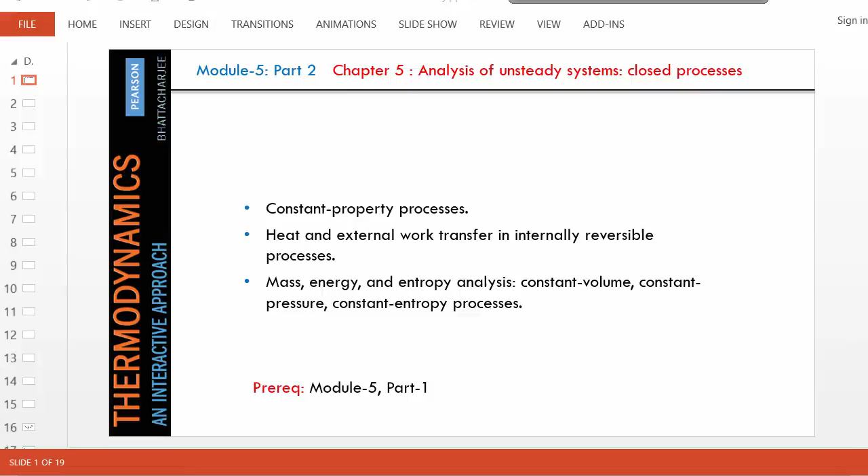Now that we have laid out the balance equations for a closed process, let's look at different types of closed processes. But first, let me write the equation that we developed for describing a closed process. If you recall, delta E equals Q minus W external. And most of the time, KE and PE are negligible. And this is what we get for the energy equation.

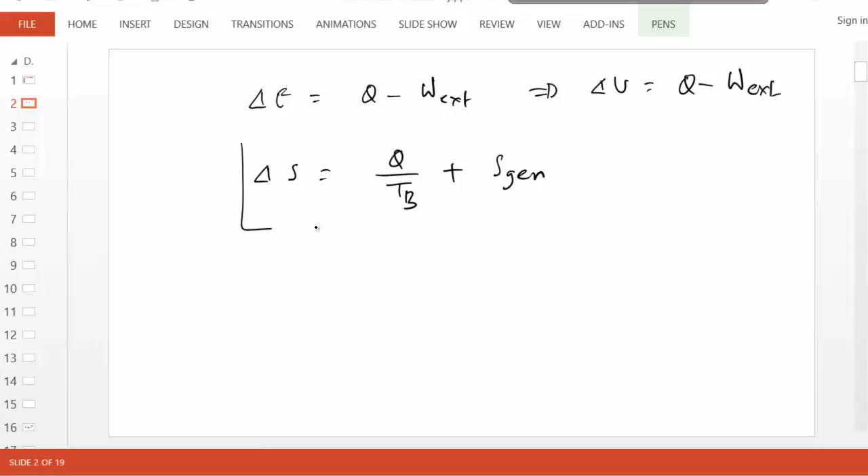Similarly, the entropy equation is Q divided by TB plus Sgen. So let's keep these equations in mind and let's visit some animations to explore. Now the first one, this is a little bit abstract, but we want to figure out the meaning of the TS and PV diagram.

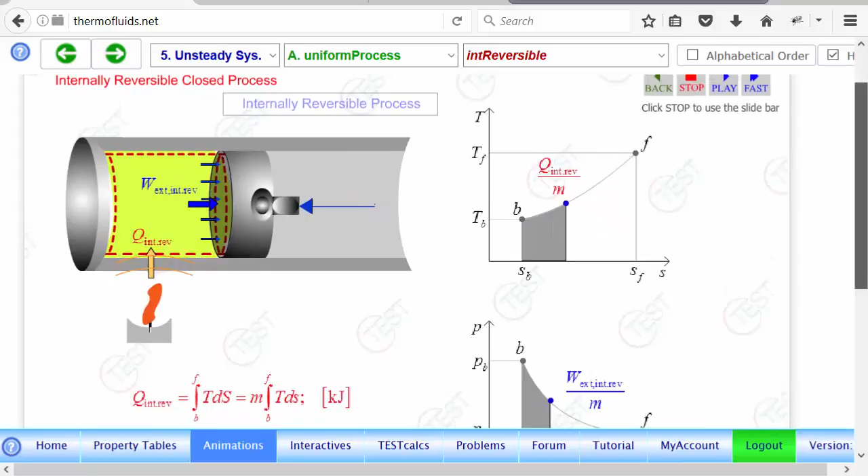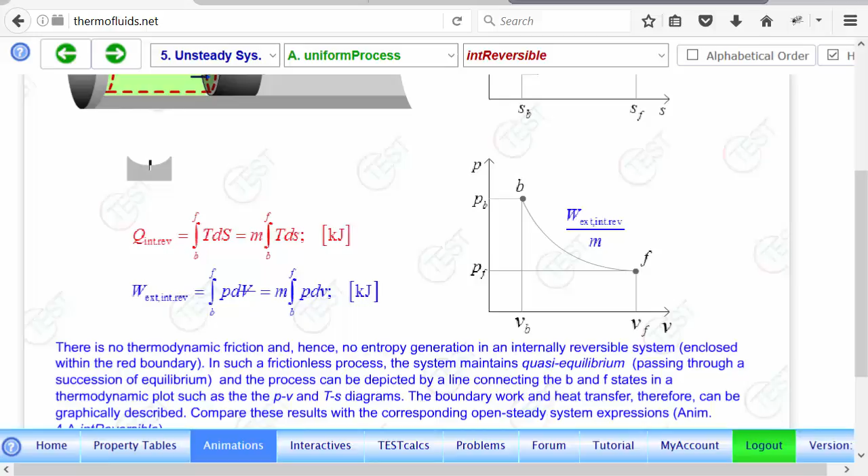First of all, here we have a system that is going through a process from a B state to an F state. And of course, we know that the boundary work is given by the area under the PV diagram. Strictly speaking, it is true only when the system is internally reversible. So this is a handy formula to remember. The area under the PV diagram is the boundary work. Of course, if instead of V it is specific volume, then it will be boundary work per unit mass.

But look what we get if we take a look at the entropy equation. If you recall, the entropy equation is something like dS equals Q over TB plus Sgen. So if the system is internally reversible, this goes to 0. In other words, if we add a very small amount of heat, then the change in entropy will be dQ over T, because internally the boundary temperature and the system temperature are the same.

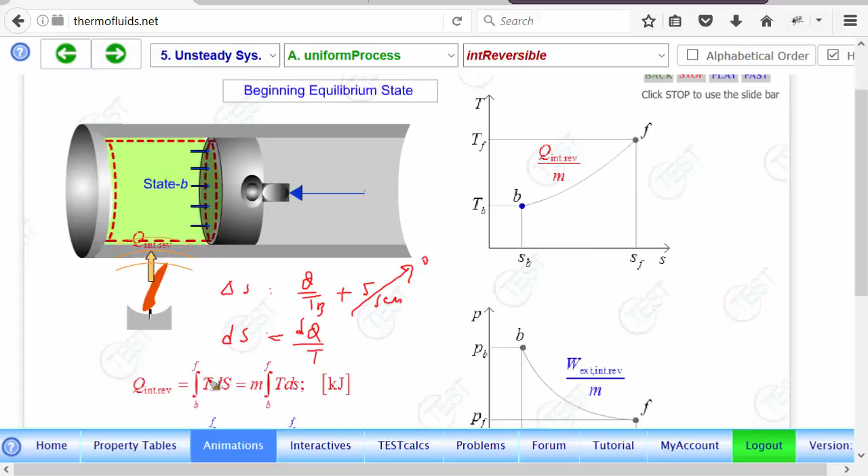So therefore, if we integrate this equation, we get integral TdS becomes exactly equal to the internally reversible heat. If it is entropy per unit mass, we are dividing by mass. Therefore, we can see that the area underneath is proportional to the heat transfer. So you draw a TS diagram for a closed process and a PV diagram. One plot will give you a visual picture of heat transfer. Another diagram will give you a visual picture of boundary work transfer.

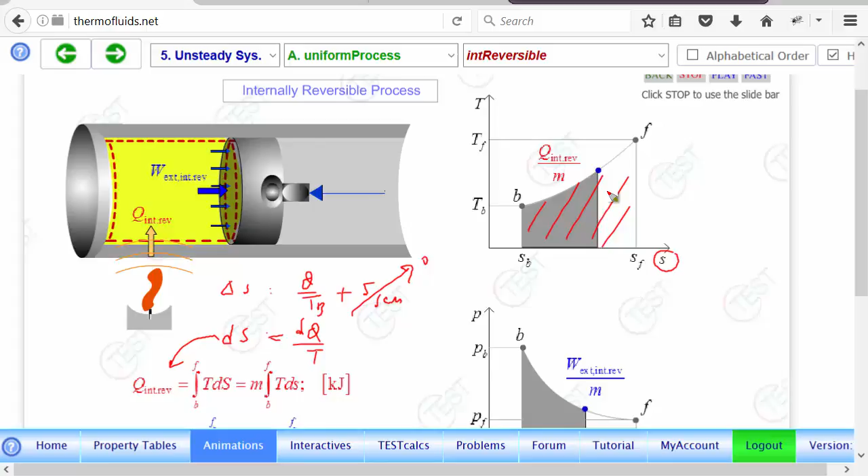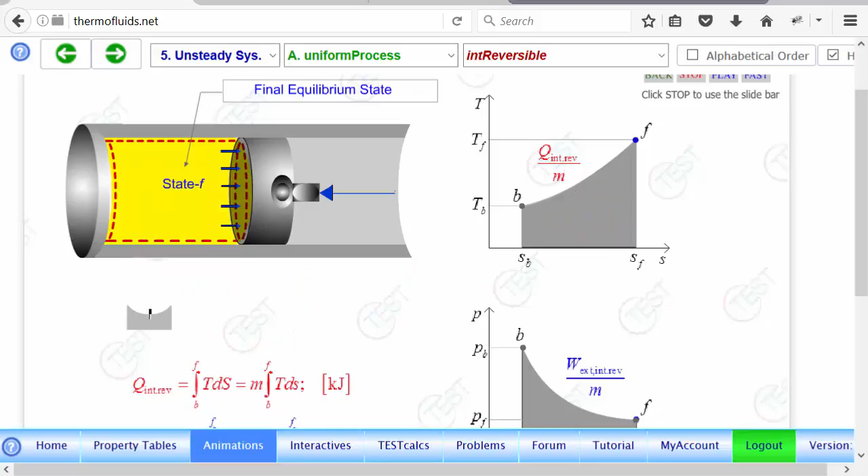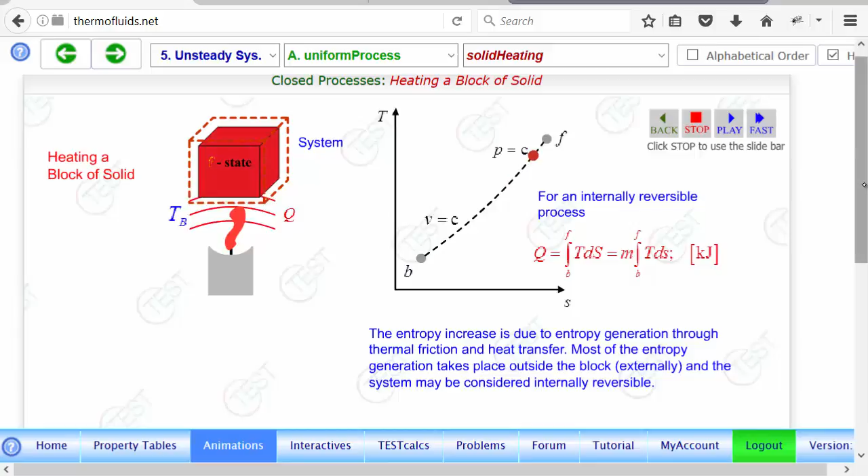These concepts become very important when we study, let's say, IC engines. In ME 351, we'll be doing that. So this will become useful later on rather than right now. For the time being, let's go and explore several other processes. We have already done some constant volume. Remember the heating process, we even solved a problem. These are straightforward. The mass, energy, and entropy equations you have already encountered.

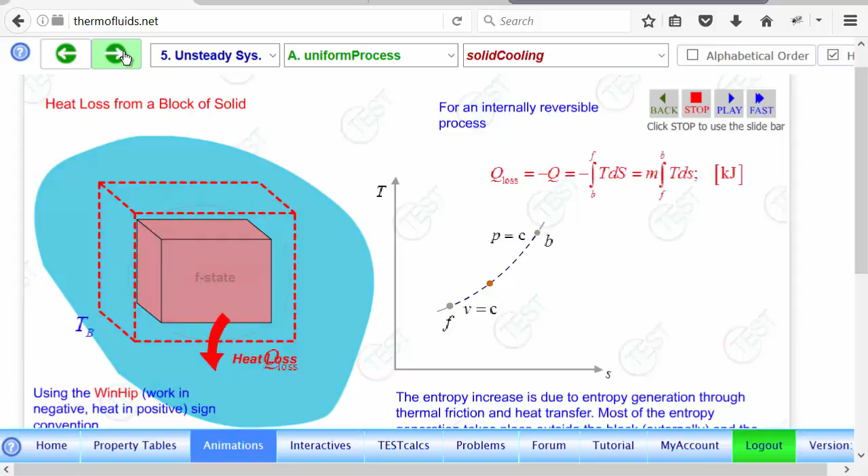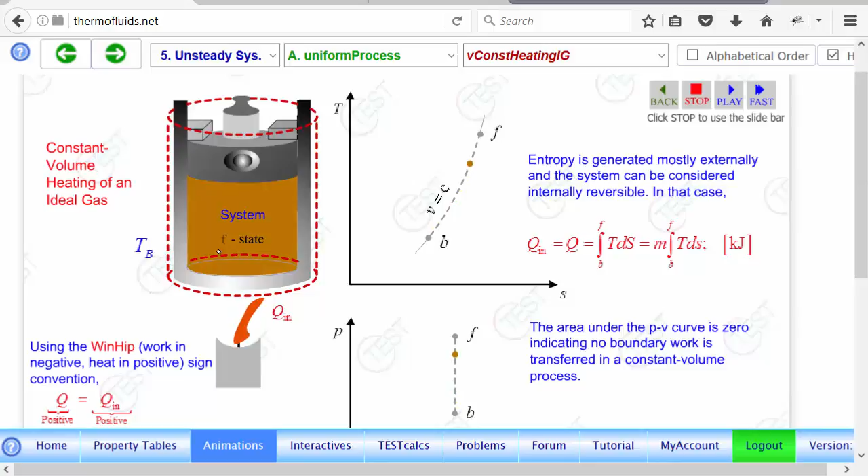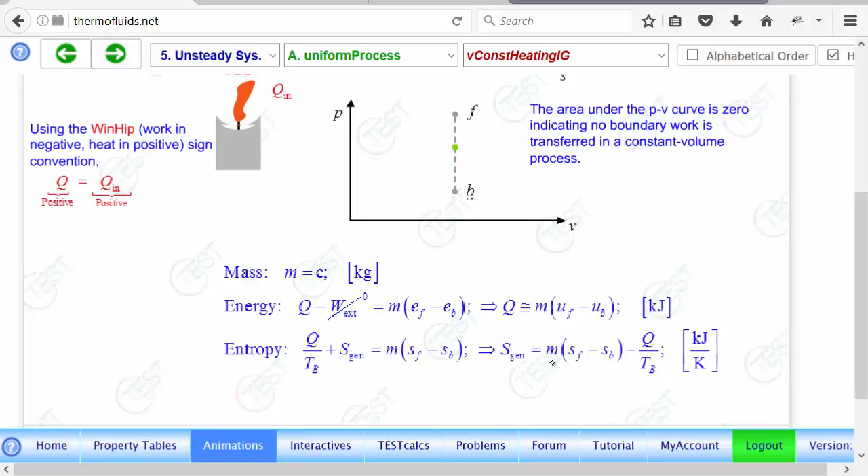This is a heating of a solid block. This is a solid cooling. So I would suggest you go over this animation. This is a constant volume heating. We'll do some problems like that, but you can see that when the gas is being heated, the mass, of course, remains constant. The energy equation is the same old. There is no work transfer because there is no change in volume. The entropy equation will give you entropy generation, and the energy equation will give you the heat transfer. So constant volume processes are relatively easy to solve.

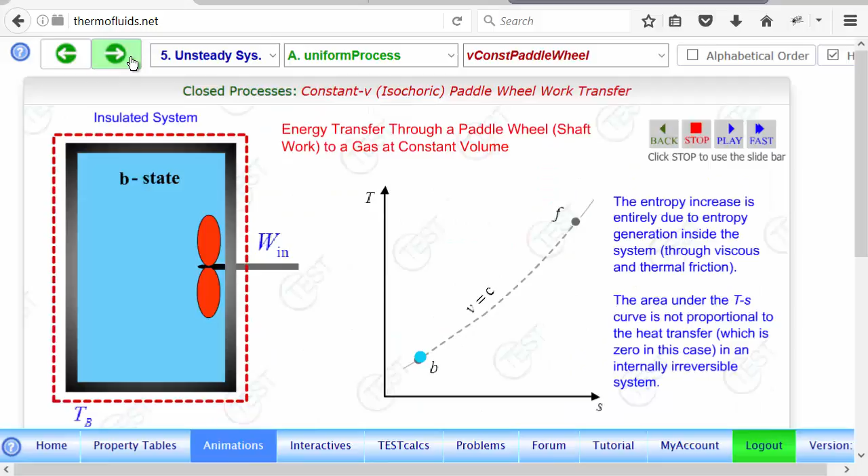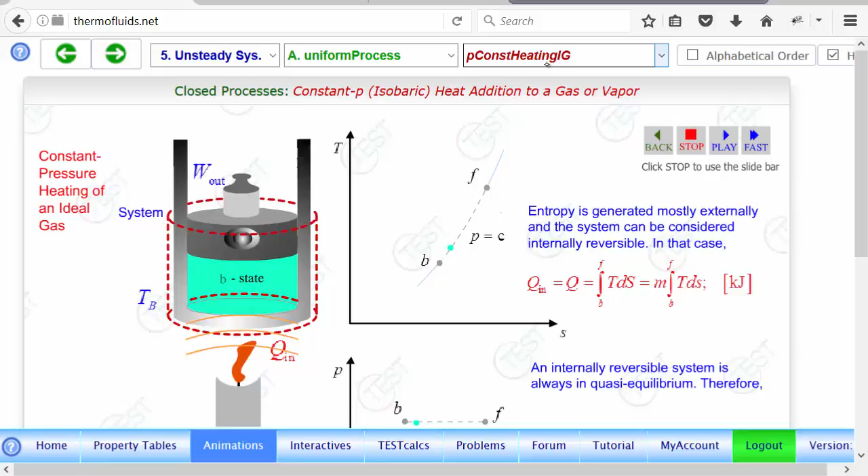Let me go to a constant pressure process. These are all examples of constant volume, V constant, so you can browse through them. This is an example of a constant pressure heating involving an ideal gas. Again, our focus should be what our mass, energy, and entropy equations will be. First of all, look at the system, the gas or fluid inside the piston cylinder device. As I heat, there is a heat transfer. The fluid expands, so it probably is a gas or vapor. As it expands, it pushes out the piston, lifting the weight and the atmosphere on top of it. Don't forget the outside atmosphere.

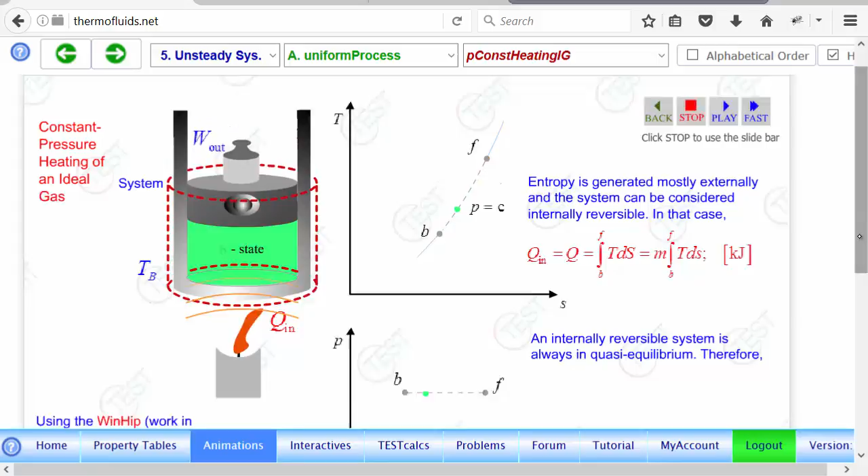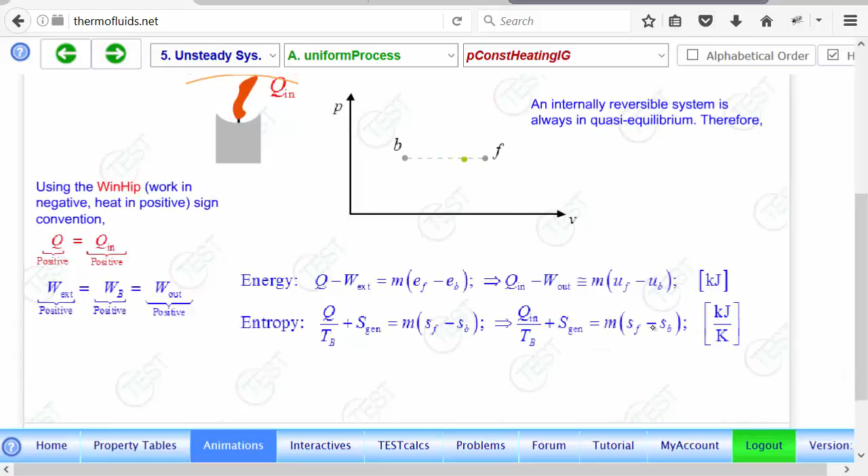So there is a lot of boundary work crossing the piston boundary. There is heat transfer pouring energy in, and boundary work taking energy out. And of course, the temperature of the system changes. So if you look at the energy equation, delta E, which equals delta U if KE and PE are negligible, equals Q minus W external, and in this case energy is coming out by work. So Q in minus W out. This becomes our energy equation. The entropy equation is again straightforward. The work doesn't involve entropy, so it remains the same. We can go on, and there are more processes discussed here.

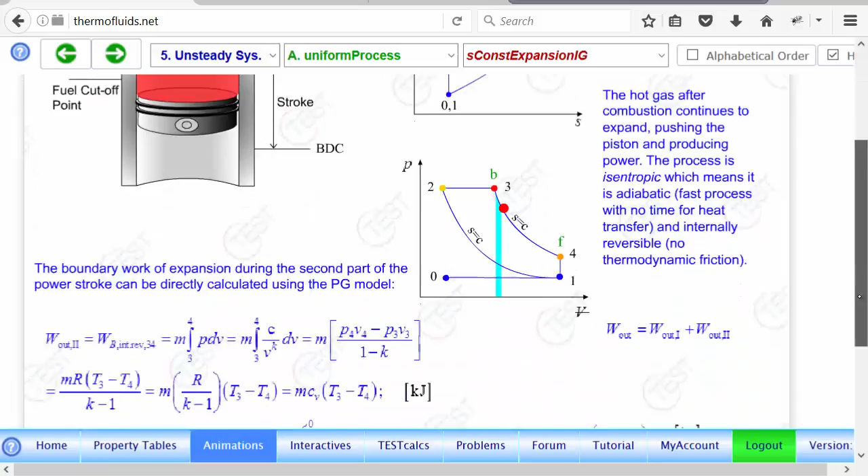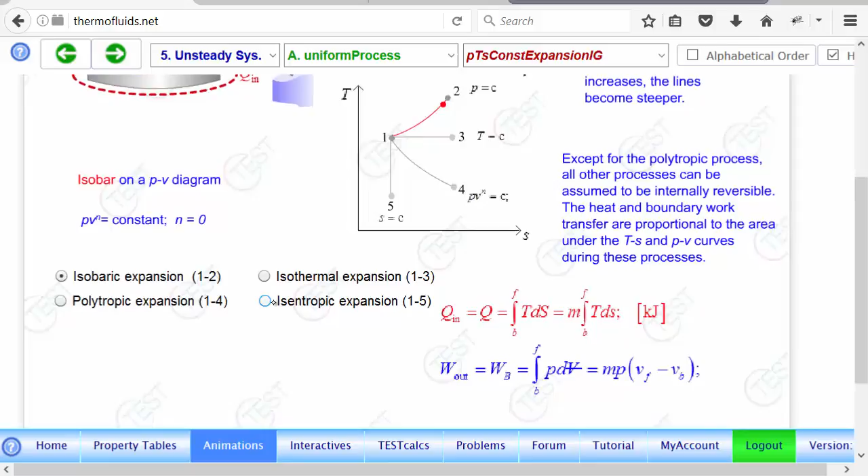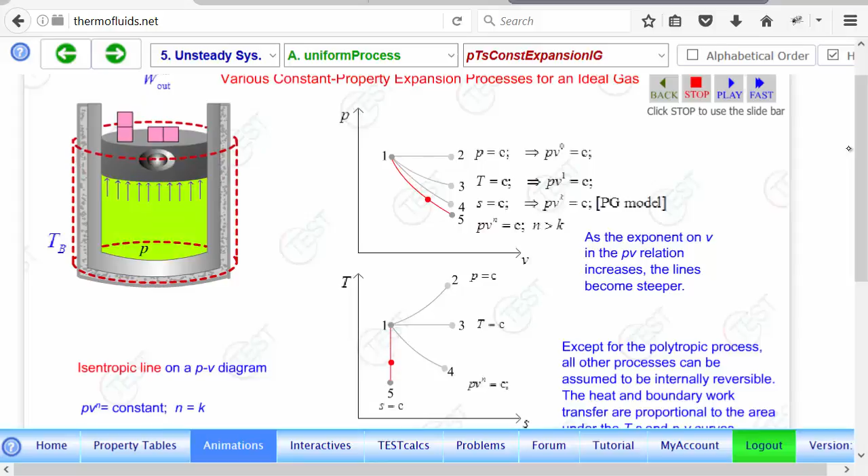So let's go over a constant entropy process. Let me see if I find one. Let me see if I find a better picture. So we want to go for an isentropic process. The isentropic process is a very important process. So let me just go to the PowerPoint and explain when you encounter an isentropic process.

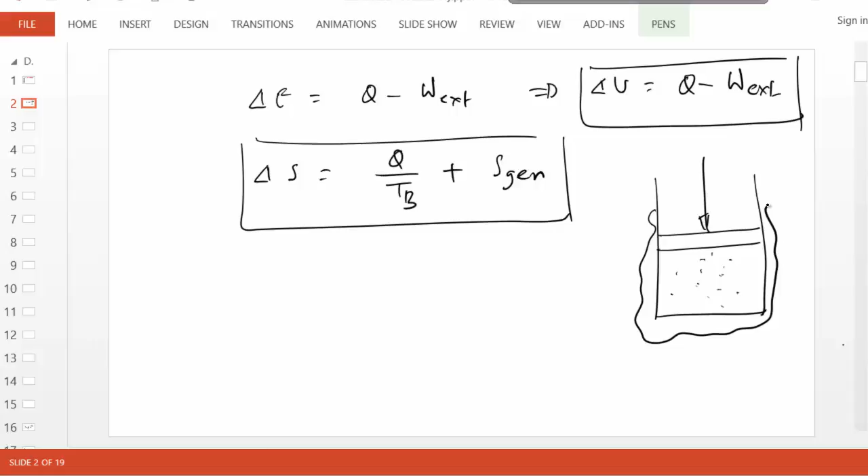It could be an expansion or compression of a gas. Suppose this gas is expanding and it is pushing the piston out, and there is an adjustable force on it. But also we say the piston cylinder device is insulated. So immediately we know Q goes to 0. And now suppose as the gas expands, there is no friction inside. So we are putting two conditions. One is the process is adiabatic, no heat transfer, and no internal friction, and you know what quantifies friction: entropy generation.

So if these two conditions are satisfied, delta S becomes 0, therefore S2 equals S1. In other words, the gas will expand without a change in entropy. That is very possible. Similarly, if you compress a gas, the same thing happens. Entropy can remain constant as long as it's adiabatic, and there is no internal friction, which is a very good assumption, because when a gas is compressed, its pressure and temperature increase everywhere simultaneously. So there are not too many internal differences to be destroyed, not much internal friction.

But how can you make sure that Q equals 0? One is, of course, if you insulate the system. Another is if you compress something very quickly; then there is not enough time for heat transfer. So in a car engine, when air is taken into a piston cylinder device and the piston rams the air to a small volume, we'll see isentropic processes occur. So let's go and solve a number of problems with different kinds of processes, then these ideas will solidify.